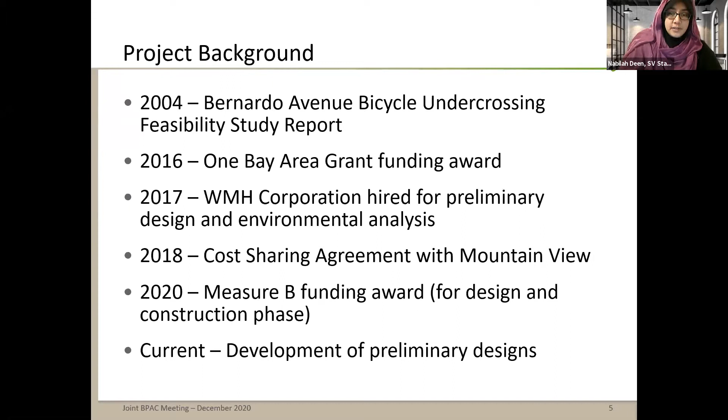Currently, we are working on development of the preliminary designs, which we'll present shortly. We're collaborating with multiple agencies, private and public, including Caltrain and the county, on the project designs. As we're still receiving input from them, some aspects of the design may be altered, but tonight we're requesting input on public concerns and priorities for the design as we move forward with alternative designs. So David, you can go over the next slides.

Thank you, Nabila. Good evening, everybody. I'm very happy to be here. I'll start with a project limit slide to orient you. The top of the graph is essentially north. As Nabila said, we want to make that connection between South Bernardo and North Bernardo Avenue. There's quite a big gap that we want to close.

The next closest crossing is really Mary Avenue, about a half mile off the edge of this page. But in this vicinity we have businesses, developments, and residences. There could be quite a demand to close this gap for bikes and pedestrians. The objective and purpose of this project is to prepare a nice, safe crossing so people can make that connection from South Bernardo to North Bernardo.

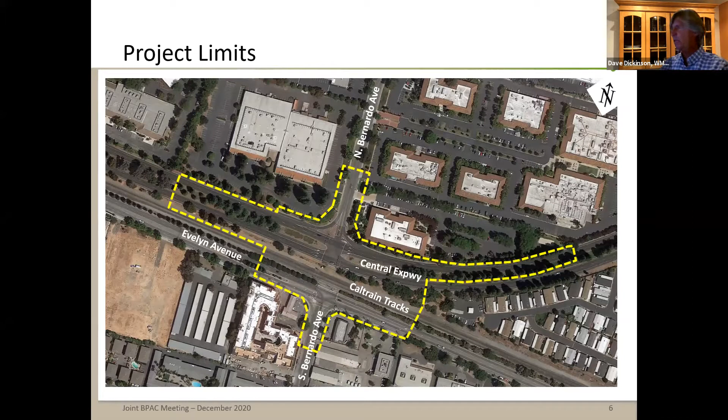Just a little bit about the setting we're working with. I wanted to run through some of the constraints we took into consideration as we decided the best way to get from one side to the other. Starting with the right of way, the property: essentially everything north of Central Expressway, this is Mountain View up in that area, then Central Expressway as well as this little triangle piece of property, is all county right of way, and we're coordinating with them as well.

And then we have the Caltrain corridor right here. We've had some meetings with them, and with high-speed rail coming down the line, they've asked us to consider the addition of potentially a couple more tracks, as well as electrification with some of the poles and lines that are going to be in there.

So those are things that we're evaluating as we figure out how we're going to handle this crossing. Also, in this area directly between South and North Bernardo, there's an entrance that Caltrain currently uses for their maintenance crews, with some control boxes and panels. So there's quite a bit of stuff in that particular area.

There are also some developments we need to be cognizant of. One is 189 North Bernardo in the upper northeast quadrant of the project. That's currently in the planning stage, but this whole area is going to be built out nicely, and the existing building you see here is going to remain. So that's one of the things we want to make sure our alternatives don't impact.

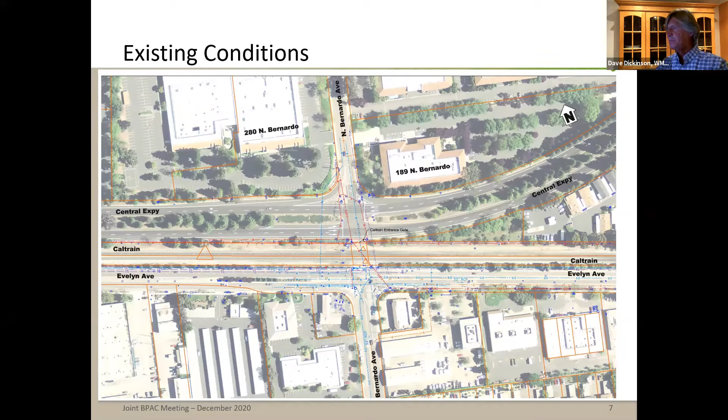What I thought I'd do now is go into some of the alignments. We have options looking at the east side of Bernardo and then the west side. I'll start with the east, but before that, I wanted to talk about how we considered whether to go over Caltrain and Central Expressway, or underneath it.

The analysis concluded that going underneath made more sense. Part of the reason is that to get the height needed to go over Caltrain—with the trains themselves and electrification—and since we're designing these ramps to ADA standards with maximum grades held, the ramps became so long it was infeasible. When we looked at going underneath, the ramps became much shorter, about 270 feet long, making it a much more viable option to cross underneath Caltrain and then underneath Central Expressway.

We also visited a number of similar undercrossings in the area to see what we liked and take something away from it. At this time we're looking toward an undercrossing about 20 feet wide and about 10 feet vertically deep. We're not set on that, but that's what we've been considering so far—two-way bikes and peds, 20 feet wide, 10 feet vertically.

We have the western alignment, and I have several different kind of permutations that I'm going to run through real quickly here, but they're all similar in concept, if you will. We're going to start just like you see here at South Bernardo and Evelyn intersection, head over here to the west, and then we're going to end up tying back here.

So again, this would start at on Evelyn and then run down here underneath the tunnel. And this particular option I'm showing you, this has that same ramp that we just talked about for the eastbound Central Expressway bicyclists. Now they kind of have to whip a pretty sharp U-turn to take this ramp, but contrary to that, if people are coming and they want to use it, it's a nice smooth line. And there, the opening for daylight would be right here at the base of the ramp, kind of like what was shown in the eastern alternative. And then when you get over to the north side here, we have some ramps and access, which I'll talk a little bit more in a moment. But so this option is if we have this ramp and where the opening would be for daylight.

This option is, what if we choose that bicycle ramp is not the way we want to go? We're still proposing that there would be an opening in the median of Central Expressway so that the undercrossing structure has something to break it up and get some natural light in there and just make everybody feel a little bit better. So kind of going back up, that's really the options. If you have the ramp, the opening would be here. If you don't have the ramp, the opening would be here.

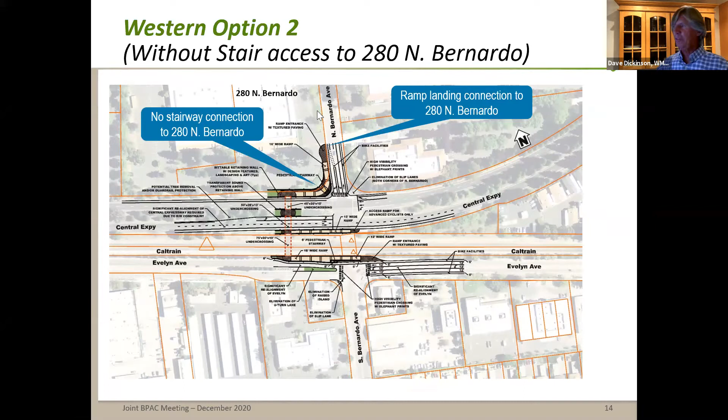So here's the other option. Pardon me. So this doesn't have the stairs, but they're really pretty much the same. We have a staircase right here for those at the crosswalk that are able to use it. We have a ramp right here for those that choose to use it, or if they're walking from this distance right here, I'm sure they're just going to jump right on it.

Then the last thing I wanted to talk about was the entrances down here on the South Bernardo side. Pardon me, we have a couple options.

This first one here, we kind of have dual access points, if you will. You can see these thick crosswalk markings here. The idea is that one of them, this one where my arrow is, could lead you right to a staircase that will take you into the crossing and head under. But if you're crossing on this side of the street, then you'd get here where the ramp is, and you could take the ramp in.

Or if you're riding your bike, for example, down Evelyn Avenue, you're probably going to want to just jump on this bike path and zoom on down here. So this is kind of the dual entrance with stairs for one of them, for a shorter trip, if you will.

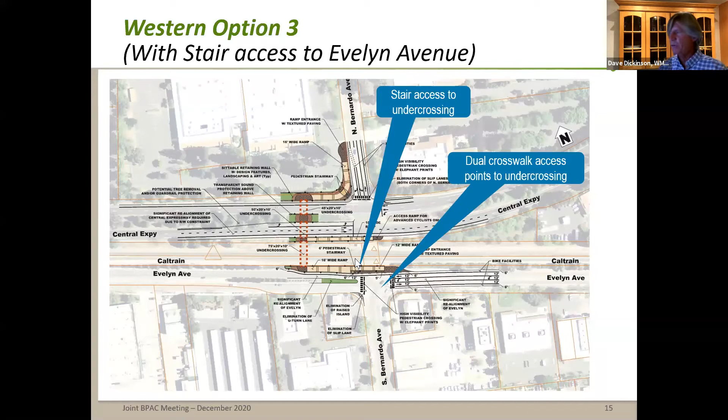And so that's it for me. At this point, I'd like to hand it back to Nabila to continue the presentation.

Nabila. I think Nabila might have frozen. Do you want to just walk us through the next stages, Dave? Yeah, certainly. And as soon as she comes back, then I'll stop.

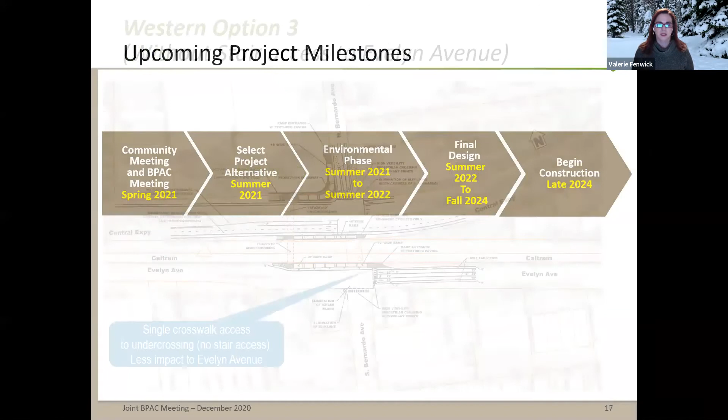Hi, this is Valerie from Mountain View BPAC. I have a clarifying question, please. I was confused looking at the schematics of the center tunnel for eastbound Central Expressway, and I think you covered this in all examples and all options: is that for eastbound cyclists to exit Central Expressway, or can people get onto Central Expressway from that? Because that's not the best part—the eastbound Central Expressway there is not super nice for cyclists.

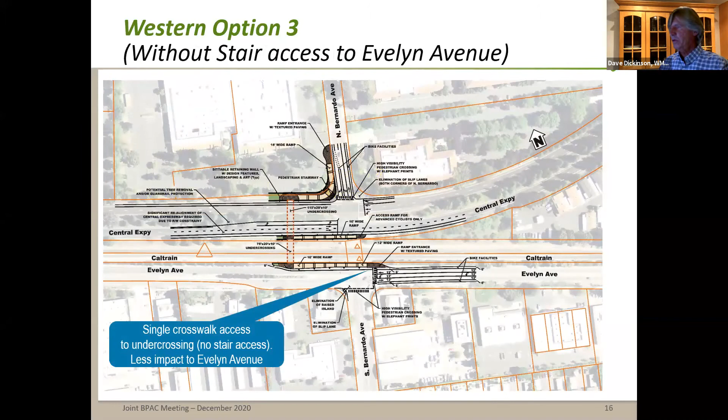We recognize that. In fact, we had some discussions about how to make sure that it's not a great place to ride a bike, so we were trying to determine things like experienced bike riders, and that's why we're wondering if it's the right thing to include. We figured people probably would use it in both directions, up the ramp and down the ramp, if I'm answering your question correctly. That's why we're kind of debating whether to have it or not.

Thank you. My other clarifying question is with regard to the stairs to 280 North Bernardo. You mentioned there's some construction there. What type of facility is that? Is it office or residential? Are you talking about the one on the northeast side or the northwest side?

It's labeled 280 North Bernardo, stairway connected to it. Yeah, so that's essentially a similar building. They've just done some facade changes. So it's office, but they've incorporated visual access to the undercrossing as part of the facade and landscaping changes. Those were all my questions. Thank you.

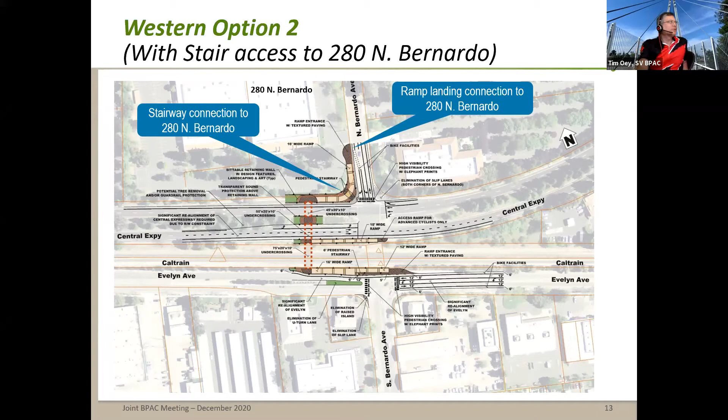Thanks very much. If you could switch to the Eastern Option 1 slide, I have questions based on that one. What is the flow for a southbound cyclist coming down Bernardo and getting onto this and continuing on South Bernardo? How do they work through these two intersections?

You're talking about somebody coming down North Bernardo here, they're in the left-hand turn pocket. How are they going to get into this ramp? So do they actually go in the left-hand turn pocket to get onto that ramp, even though they're not making a normal left-hand turn, because they're actually getting onto the crosswalk? And will cyclists be able to ride that, or will they have to get off their bike and walk it?

It's an excellent point, excellent question. Right now we have the lane right here, the bike lane that terminates into the crosswalk, and then they would head over here into this ramp. So I guess we're still kind of working on some of the details for that, but that would be the idea.

So what we were showing here was kind of your typical bike lane, so that there's room for the right-hand turn lane on traffic heading south, and then this bike lane would probably get into the crosswalk and head over this way. And then on the South Bernardo side, the others go further south. From there, the cyclist is continuing on down South Bernardo. What is the flow at that other intersection on Evelyn?

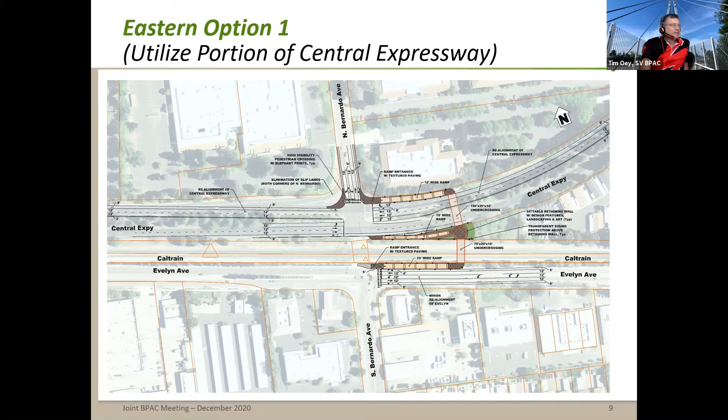Thank you. So I noticed on the westbound, or sorry, the non-eastern option, the ramp was marked for advanced cyclists, and I just wanted to confirm that the widths were the same. Was it really that it was just because of that sharp turn that it was labeled as advanced cyclists only? So that was one question.

The other question was about the ramp coming up on the north side of Central. There's a sidewalk right next to that ramp, so I'm curious—it's hard to see from here what the relative widths are, but you'd essentially have a sidewalk right next to something that's 10 or 20 feet deep. So I'm curious how that would work to avoid issues, what the width of the sidewalk would be, given that you'd need some sort of physical barrier to keep people from falling down into that.

Yes, I understand. So first of all, both the ramps in the eastern and the western alternative would be 10 feet wide. I'm not sure we should really be having this note here. It's really a preliminary concept here, and we kind of feel like what I was trying to say in my opening remarks is you want to be careful who ends up in this area on this ramp. But it is 10 feet on both options.

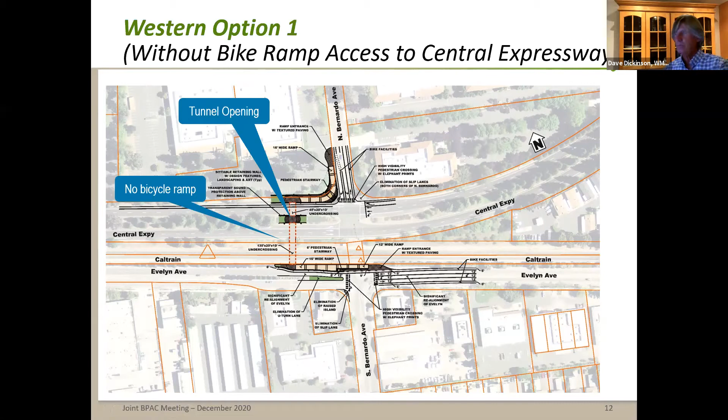The same thing applies to the eastern view. If you go back to that, it's the same problem about where the ramps start. I would move the tunnel a little bit, that way it's actually better. You can see you don't have the same problem. You come out of the tunnel and then you can either make the immediate crosswalk, or go across the intersection and cross if you're going southbound with another crosswalk, which would be needed. So that one actually looks better. The western one has a problem with the ramp ending up in the middle of the intersection, which makes it hard to move in both directions.

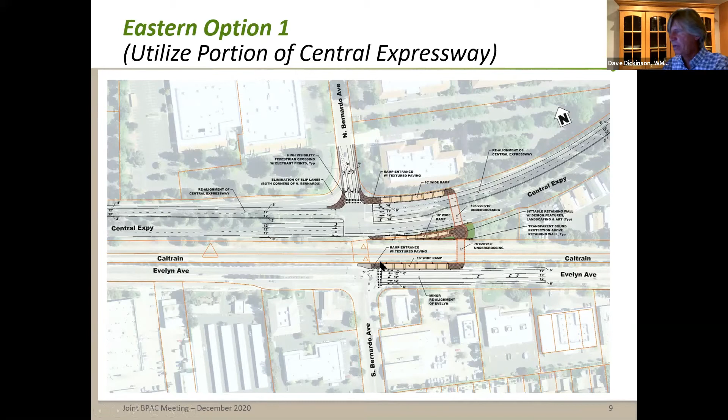I understand, I think this one's actually maybe not as bad, like you said. These are supposed to be access ramps right here, and this area is flat right here. Okay yeah, that one's better, so it's just a western approach question. But your point is well taken, and we'll take a look at this one. Maybe we should be pushing this down and try to get everybody right here. Yeah, that's what would make much more sense, I think.

That's the way the Borregas bike bridges were all built, with your landing being on the outside, and then you can use either crosswalk to get to the bottom of the ramp. Okay, that's it, thank you. That was my clarifying question, thank you very much. Thank you very much, Commissioner Cordes.

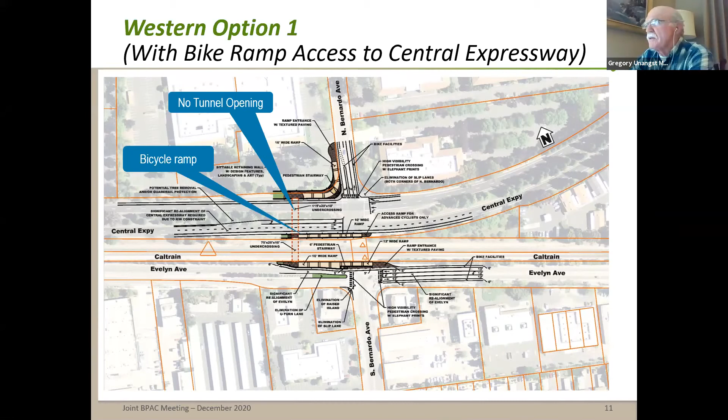Hi, unmuted. This is April. I'm speaking on behalf of the Mountain View Coalition for Sustainable Planning tonight. We feel that the Bernardo Crossing will be a great addition and would like to express our support for it. Specifically, we think it will help connect to development in the East Whisman area, which will be built out in the years to come for the East Whisman Precise Plan, as Ria mentioned earlier. I cede my time. Thank you.